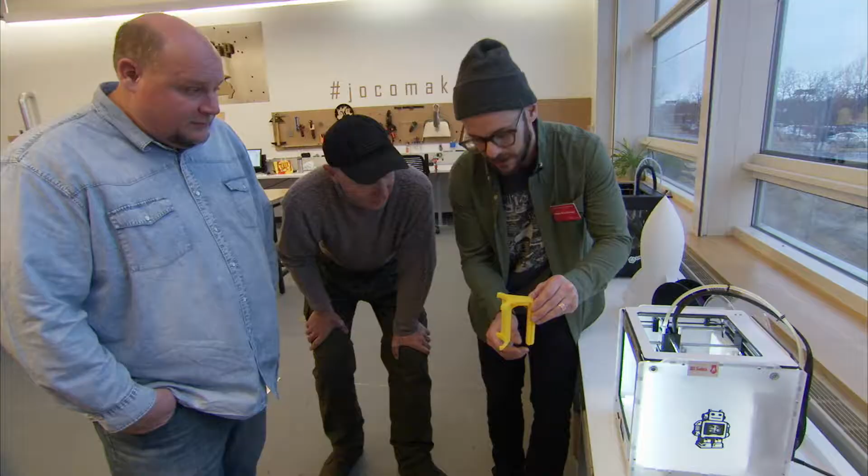Welcome to Make48. Everyone's got a big idea. Competition's come to an end. We now have 3 products that we can work with and take to market. The prize they get is a license agreement, and it's 5% of wholesale. The inventors themselves get to retain the patents on the product, and that's really important because they get to have that as an asset that they can sell one day, or it can be acquired by a bigger company.

The strategy of this is going to be really important. We're going to use a whole bunch of different companies, a lot of experts. We have to get opinions from several different people to help this product advance all the way through. Licensing is a very common procedure that happens in the invention industry. Inventors and creators have the idea but just don't have the resources to get it all the way to the end.

So we're in New York City and we're here about to go into S&S Design and meet Nisha and her team and talk about that drink slinger. My name is Nisha Sani. I'm the founder and CEO of S&S Design. We're a global industrial design firm.

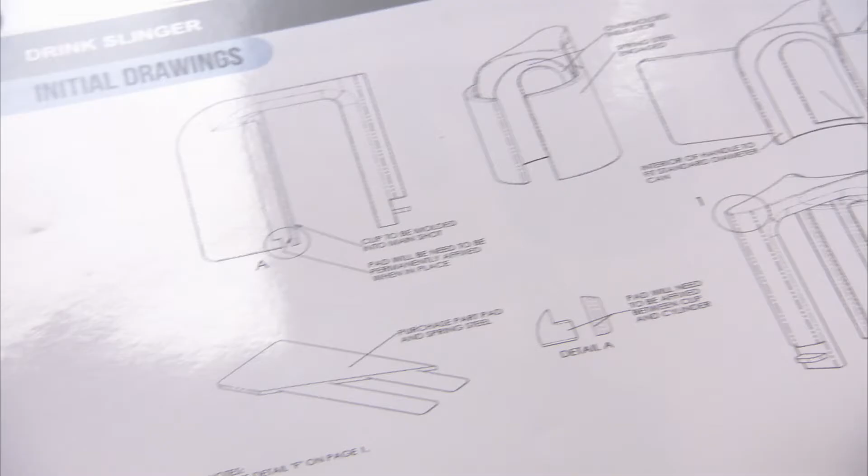Right. So we were thinking about how do we mass produce this, because there's no way we can do a solid handle. The handle was very heavy on material, so we had to do certain things to reduce the cost of manufacturing the plastic and the mold cost. So we tried to reduce the material and still make it stronger. So we provided ribs on the sides just to try it out, and we did a quick 3D printing just to see how much we can reduce material and save on cost. And with this, we realized that, you know what, there can be hygiene issues. So this is a problem that you're still working on, to clean that up. So we see it's an evolving process.

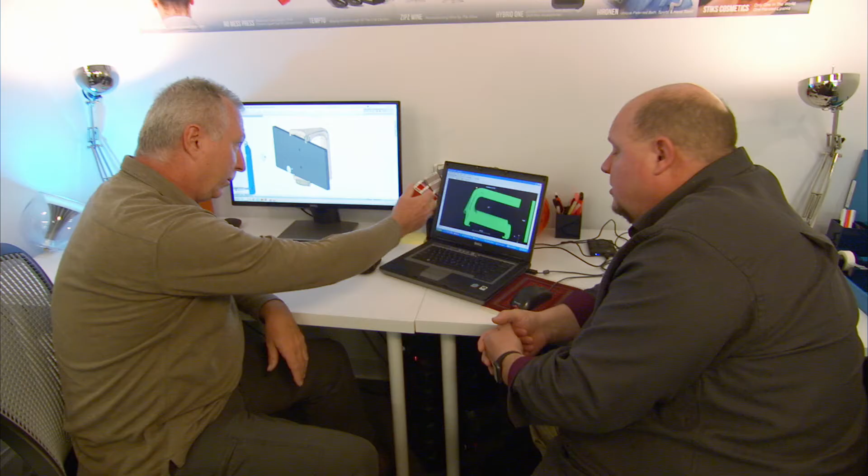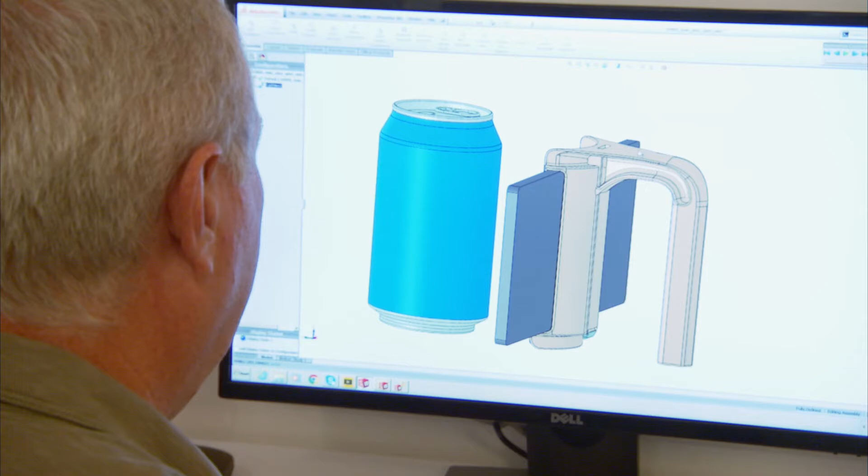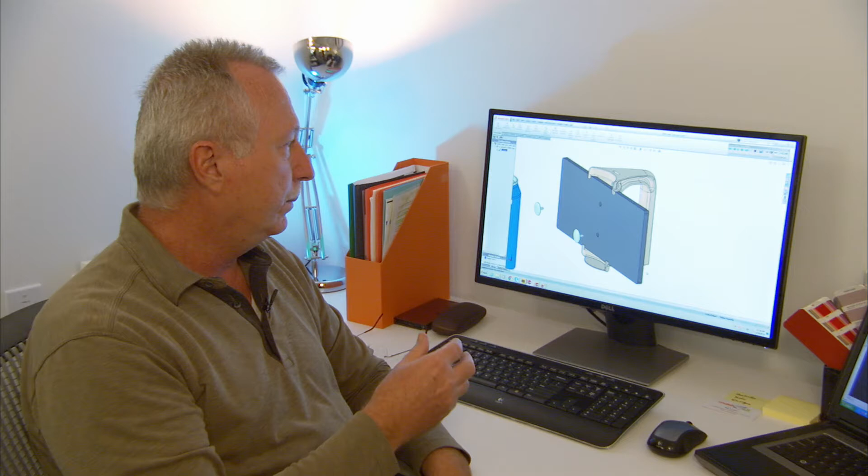Bob sits down with Joe from S&S Design to learn about digital tools that simulate injection molding. So you're always concerned about the manufacturability of this plastic, and those concerns are how is the mold made, correct? Yes. So is there a way for us to not have to spend all those expensive costs on a mold and trial it in the 3D world? The first iteration is always the lowest cost in tooling. They may not look the best, and then we'll have to compromise. Okay, we're going back and forth. This doesn't look good. I have too many ribs on a part. Let's get rid of them. Let's do it some different way. So we end up with a balance between aesthetic and manufacturability.

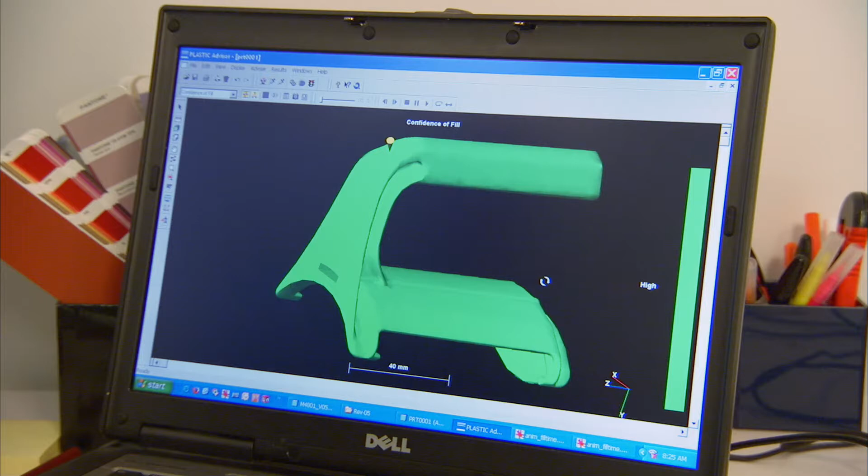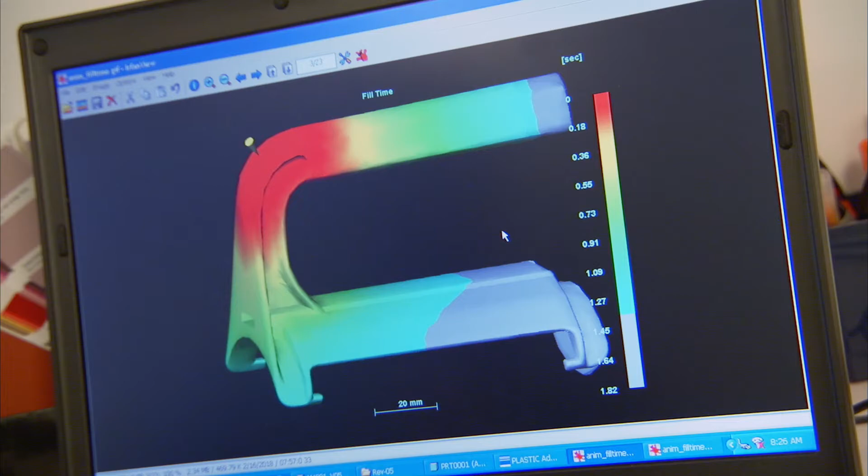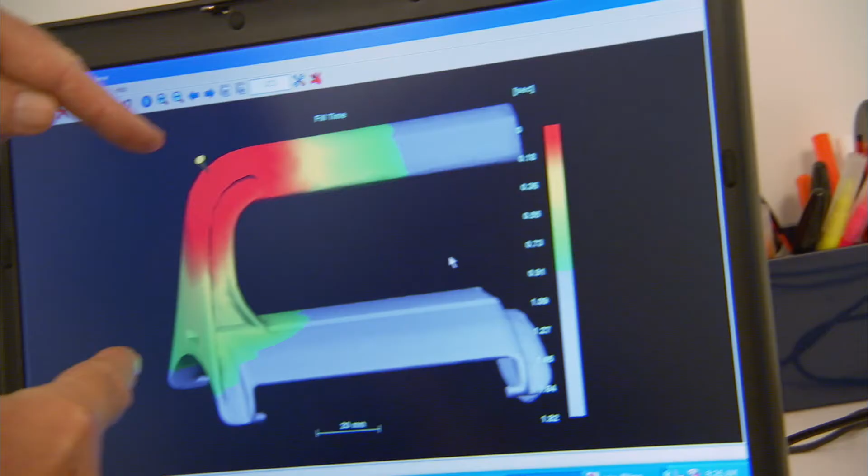Yes. In the old days, the tool and die maker that made the mold would know if that's an undercut or if your injection spot is too far away, it needs to be centered. When it cools off, will it curl? So it was a lot of trial and error. So it's amazing to hear all this, just something so simple, and there's a lot of detail and thought not only in that, but the design element, like you said, aesthetics and manufacturability. So the gate's important, the flow rate, you called it short shot, meaning it didn't fill the whole cavity and so forth. So there's a lot to think about. So that's why we need you.

The wedgie poses some unique design and manufacturing problems. Courtney meets Team DAD at Maku Design and Invent. We're here in Austin, Texas at Maku Design to go over the wedgie, and they redesigned it into a more manufacturable product. When we looked at the original photographs that came to us, the first thing that we had to do was talk to all the different stakeholders.

How would a customer use this? What are the different ways that we could conceivably build this product? What are the features that we have to have? Or what are the features that would be nice to have? Or what are the features that maybe we'll table for now?

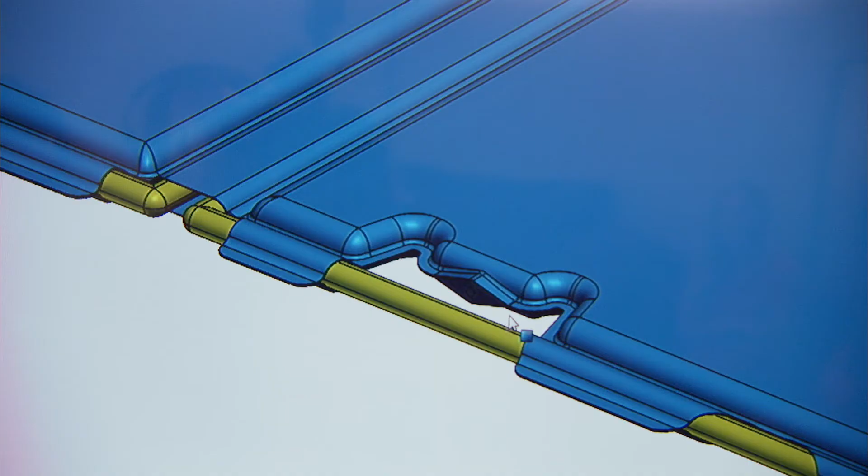A price point that's accessible to the mass market kind of limited it, but we didn't want to give up on quality. We don't want to give up on user interactability. So that's why Tim and the team from Maku put considerable effort into figuring out how you can actually build this thing in a cost-effective, manufacturable solution. We're not looking at a few units. We're looking at potentially tens, if not hundreds of thousands of units worldwide.

The wedgie overall is a simple product. All there is is padding, a little bit of fabric, and some hinges here and there. And so for the redesign portion of it, it's not going to be a big redesign like some products. The price point that we came to that we had to make this product for was roughly around $13 to $15. Yeah, and that's manufacturing cost.

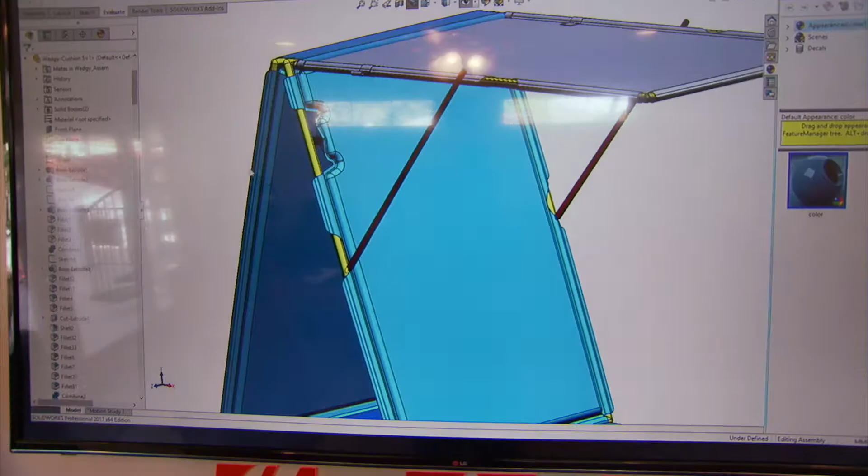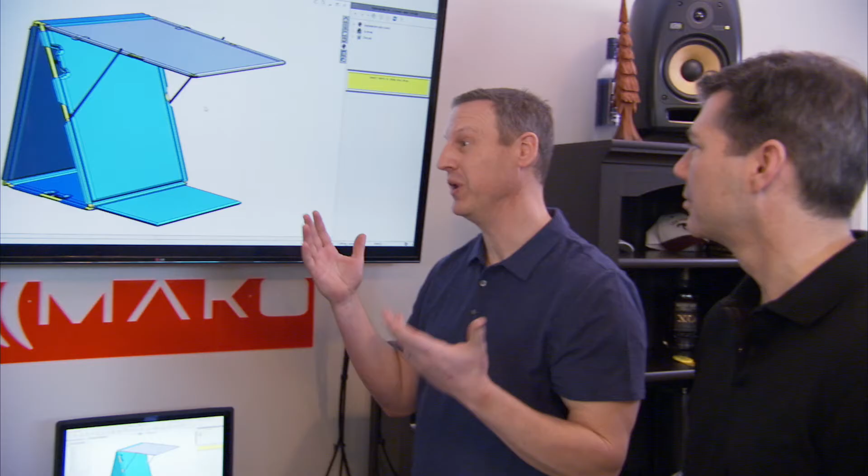The problem with the price point on this particular product is that there are very large areas of material on it. The foam and the outer covering are large pieces of fabric and large pieces of foam, and the cost mounts up pretty quickly. We did end up removing some of the foam in areas like this little pad down here, just to reduce the cost on that. But what we did add was a self-inflating system, so it acts a little bit like a camping mattress.

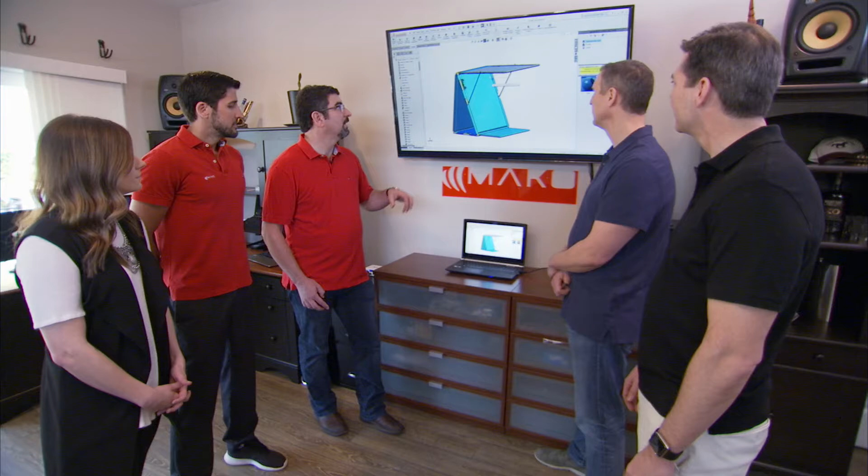I mean, we never would have even thought about that, or even thought that that was something that would fit into the price point. So it's really exciting to hear that. I think that's a great addition. We knew when we were making the prototype during the 48 hours, we were grabbing what we could. But that's why we're really happy with the fact that they have the fabric experts and the material experts to know what to make it out of. So really, I think they added a lot.

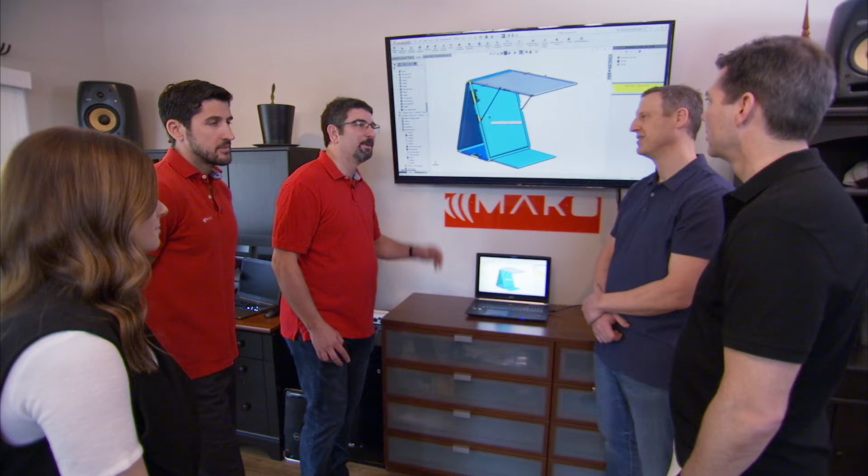It really comes down to the price of a few valves, and essentially the principle upon which an existing camping mattress works is that it has some foam inside it which expands and sucks air inside. So we already had the foam there. We thought we'd just add the air. Taking it from just foam pads, adding in the idea of the inflatable pads to make it less expensive to manufacture, more comfortable. That was an interesting and innovative approach to solving that problem.

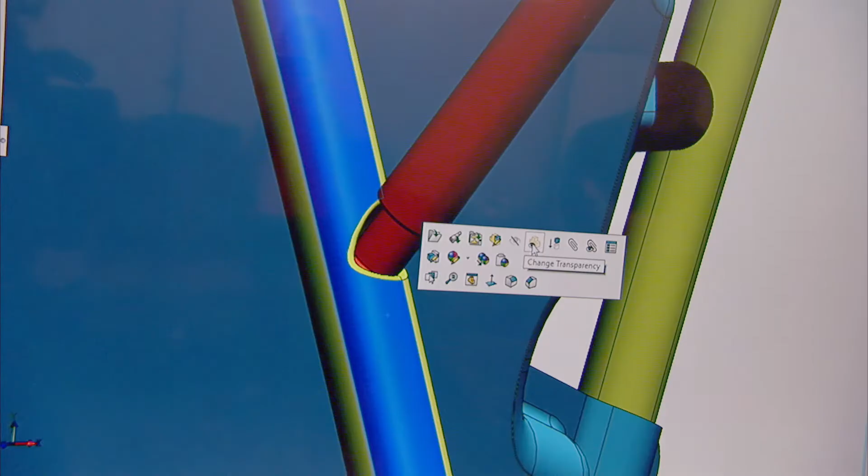So Tim, a question we had was around the awning and holding it in place. One concern was you're on the beach and the wind picks up. Does it snap into place and keep it from flopping around? The poles that actually hold the awning up clip into little slots here in the end. Oh, wow. It actually pops in there. It's got a little kind of mushroom head on that pin, so that it wouldn't just easily pull out again without you working on it.

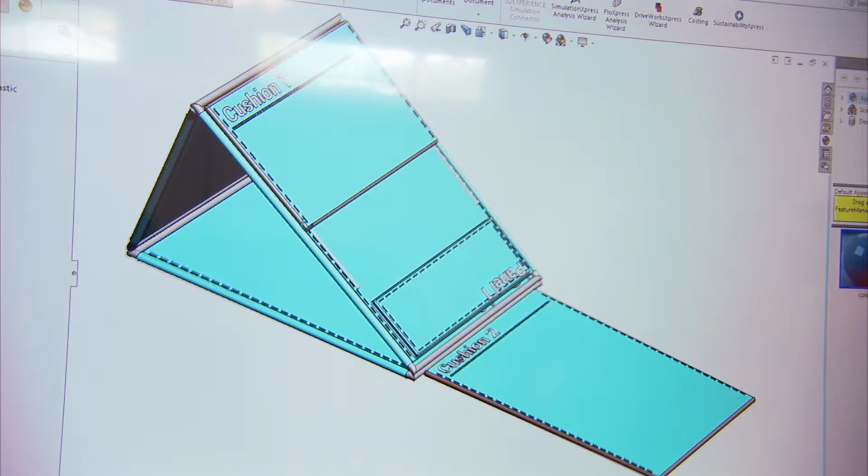Well, the interesting thing about this is that although it looks relatively simple in its final design form, there are quite a few different elements in it, quite a few different types of design techniques. You think about all the different materials: you've got the inflatable pieces, metal rods, plastic injection molded insertion pieces, and all of that. All of those are done in a way that is intended for mass manufacture at volume, which is really what's helping to pull that price point down, even just bit by bit. And it helps a lot for the eventual business, which is the most important element of getting this product out to the market.

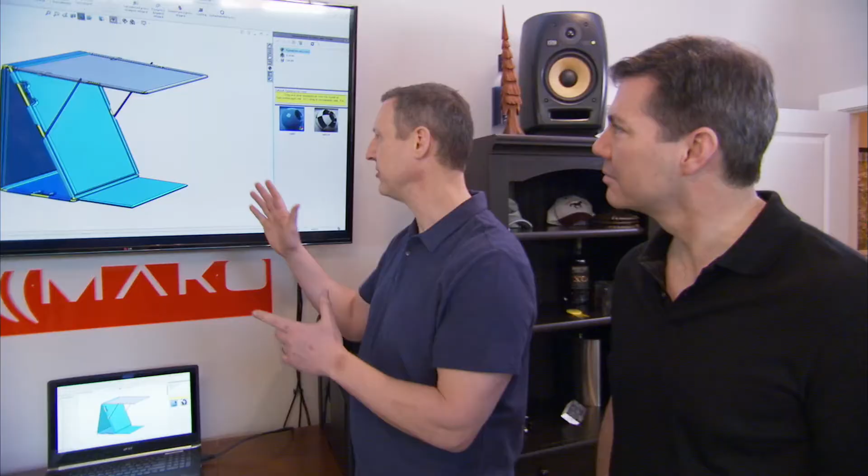In some ways, it validated our design because I felt like they didn't have to stray far from it to make the next level prototype. A lot of the structures were the same. They added in new features that were valuable, like the cushioning. To me, what differentiates it from a beach chair, when people ask why they'd buy this over a beach chair, is the fact that it lounges too. That's what makes this product so amazing, all the different configurations that we can get by just folding different panels in different ways.

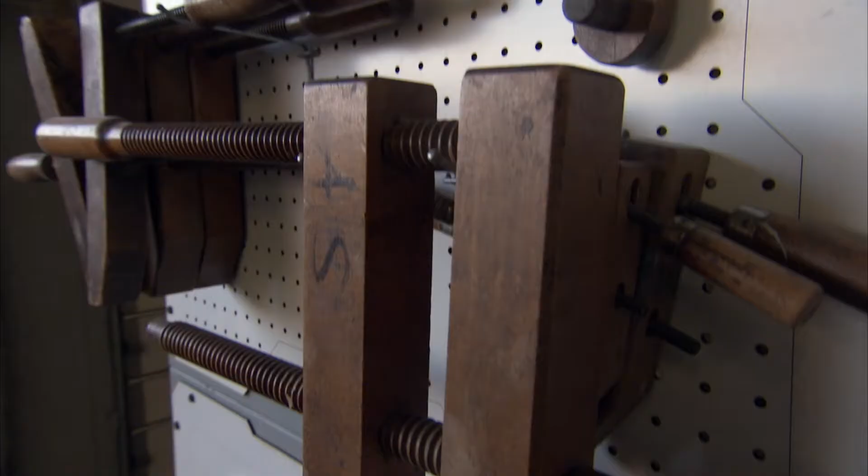Rich takes Joe from Team Believe to a local makerspace to discuss prototyping options for the 360 uplight. A makerspace is a space where they get to go use tools, have access to knowledge, tools that most people wouldn't have in their garage, 3D printers, laser cutters, including all your hand tools and wrenches and that sort of thing. So we're going to Hammerspace, that's a makerspace in Kansas City, and we're going to 3D print the 360 uplight. All right, gentlemen, this is Hammerspace Workshop.

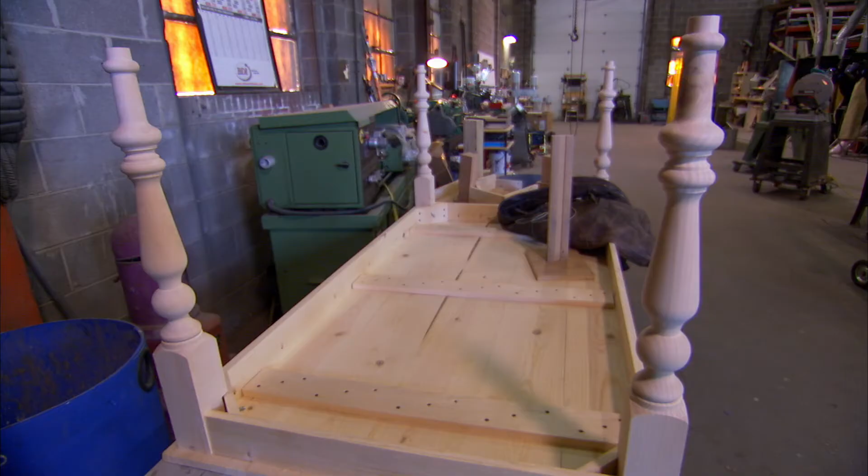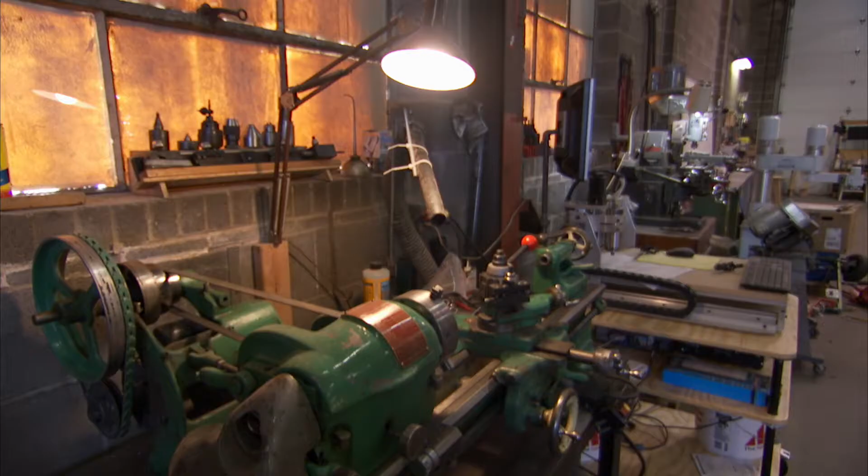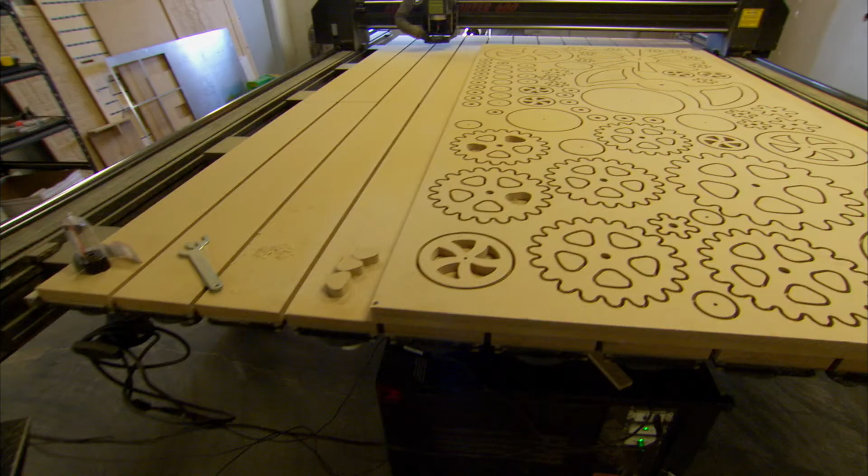We're a makerspace, which we like to think of as being sort of like a gymnasium for folks who like to build stuff. So instead of joining a gym so that you can have access to millions of dollars worth of Nautilus equipment and an Olympic-sized swimming pool, you come to the local makerspace so that you have access to walls full of tools, huge manufacturing equipment like CNC machines, laser cutters, and 3D printers. I would love to belong to something like this. Bring your dream in here and just make it happen. Pretty much like a playground for an inventor.

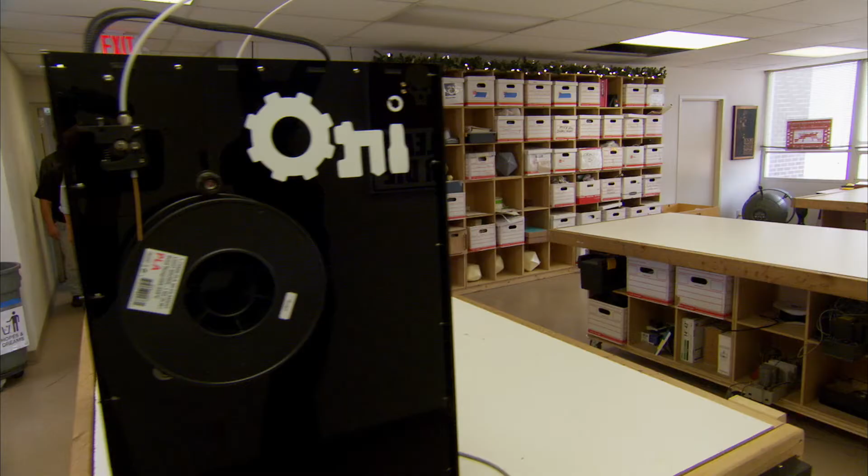So a guy could bring in on a thumb drive a drawing he needs laser cut or CNC'd and walk out, same day or next day with a professionally fabricated part for their creation, whatever it may be. I like that you can just come in here with your concept and you can just make whatever. This is the classroom space here at the workshop. This is where we teach things like drafting for 3D printers, or how to draw objects for a laser cutter, or sculpting, or other sorts of crafting.

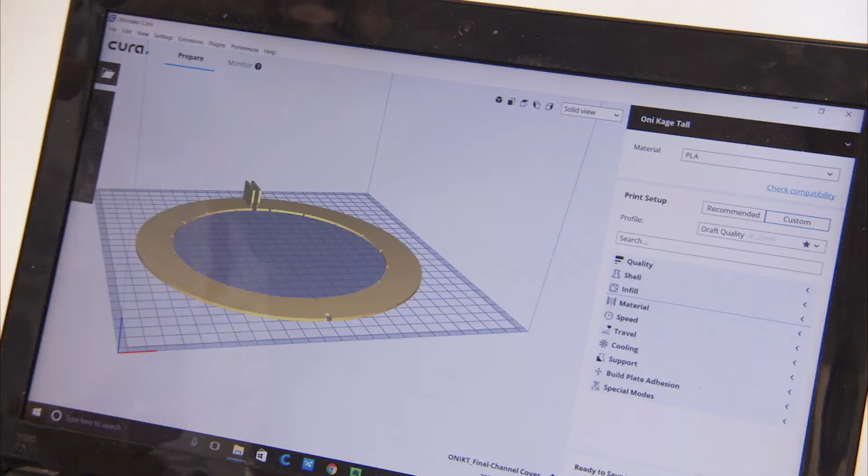What we needed for the 360 Uplight was a larger build platform for a 3D printer. So here we have a couple of printers that are currently printing some parts for the 360 Light. These are Oni Technology 3D printers, and these are made right here in Kansas City. Tom from Oni Technology developed these, and we manufacture them with his help here at the space. And we're going to print the first versions of the 360 Uplight on those printers so that we can get a nice look and feel model, make sure it works really well before we move on to the more expensive ones.

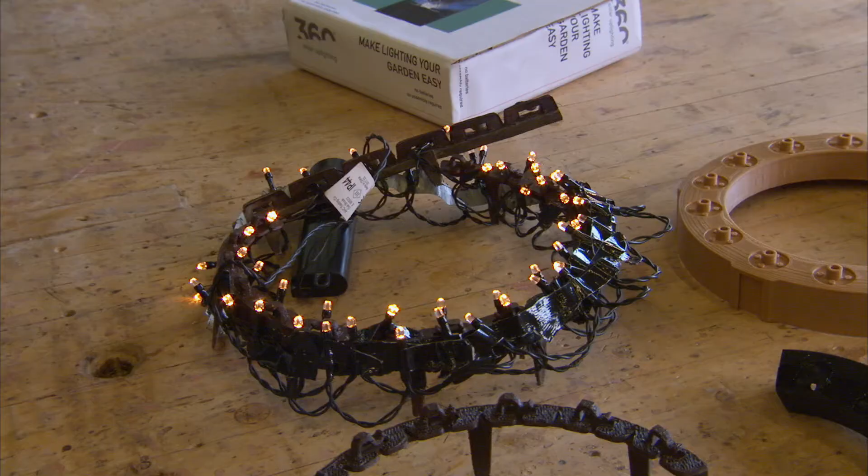Okay, Joe, you recognize this? Yeah. This prototype, I like to say the first ones always have to be ugly or you're not doing it right. I think it qualifies as ugly. Well, I think beauty's in the eye of the beholder. $48, it's not too bad. So get to your proof of concept and then iterate. Absolutely. Right. So speaking of iterate, we've come a long ways here through iterations of different 3D prints.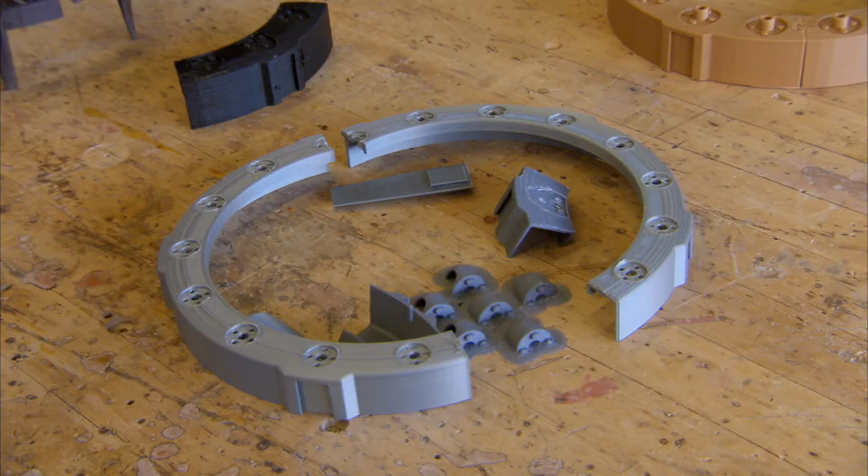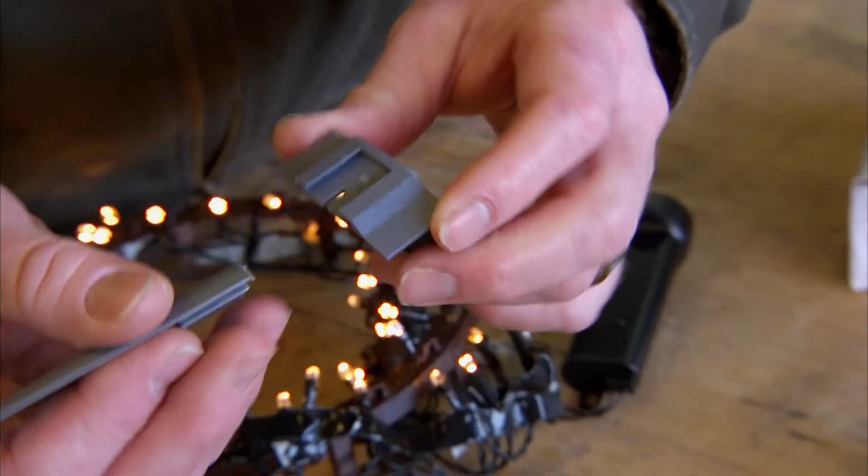This one, for instance, we did on our printers, which cannot print the whole thing. They can't print the full size because the build platform is just not big enough for your product. So what we did, we made it in pieces, which allows you to kind of prove the concept and take small pieces, short run, like this takes maybe a couple hours to print, and prove that that's actually going to work. I like it. Even though it's just part of it. We just take parts of it and print it. Then we can take those pieces and put them together, change them, figure out what works, what doesn't.

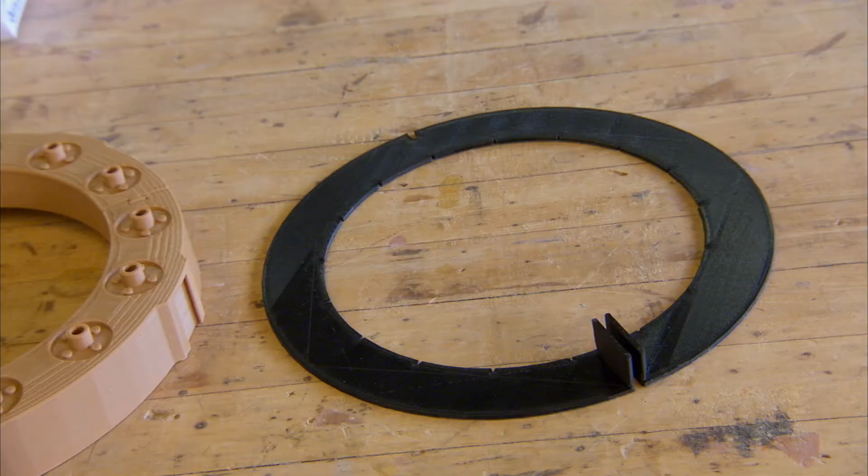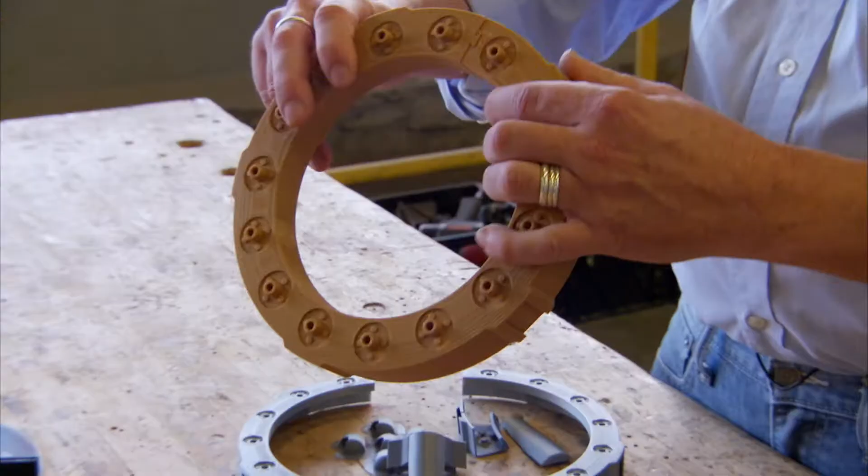And then when you're ready to make a longer print on a larger printer like Dave has, then we can do that and take the 20 to 30 hours it takes to print something like that. Right. And this came out beautifully. Take a look at that. Full size. Dave, that's what's up. Wow. Yeah, we were really pleased with how the part came out. You've got enough flexibility to get around a large potted plant or tree. And this should be a very similar consistency to what your finished commercial product will be when it gets done.

Can't wait to report to my sisters what's going on here. Team Believe, we're a really close family, and they're so excited about me coming down here to do this. And so yeah, I can't wait to tell them where it's at, how the 3D printing's going, how it's evolved. It's just a much better product now. At Make48, when we built the first prototype, what you used there, you just found Christmas lights, right? Yeah, we totally got them off the shelf. Just took them out of the stuff.

And right out of a store, off the rack, just plain old Christmas lights. Yeah. Had all these extra LED lights on it. We had to tuck them up under there. And that's a great way. Just use products off the shelf, hack together whatever you can. Right. Then after that, you want to start refining that process, and the process actually evolves into a product that you would see on a store shelf.

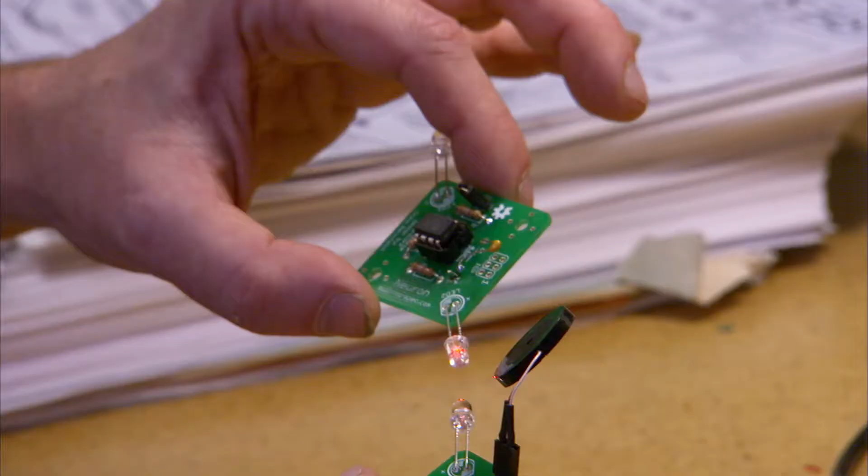So let's say you're inventing a product like the 360 Lite that needs LEDs on it. You could design a product, design those lights, exact spacing, exactly what you want with the right LEDs. One of the things we did on a 360 Lite was we ordered some LED lights with a battery pack. You can custom manufacture exactly what you want for a part to go in your end product. So you can search what you need made and find manufacturers from all over the world, a lot in China, that will make exactly what you want.

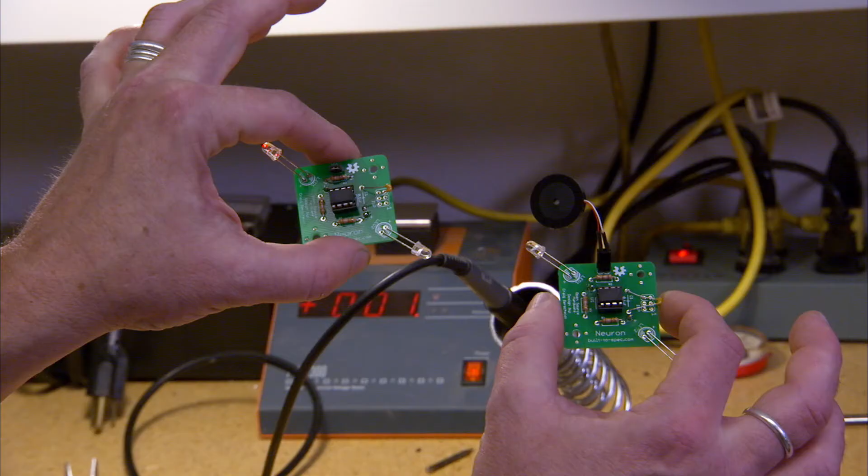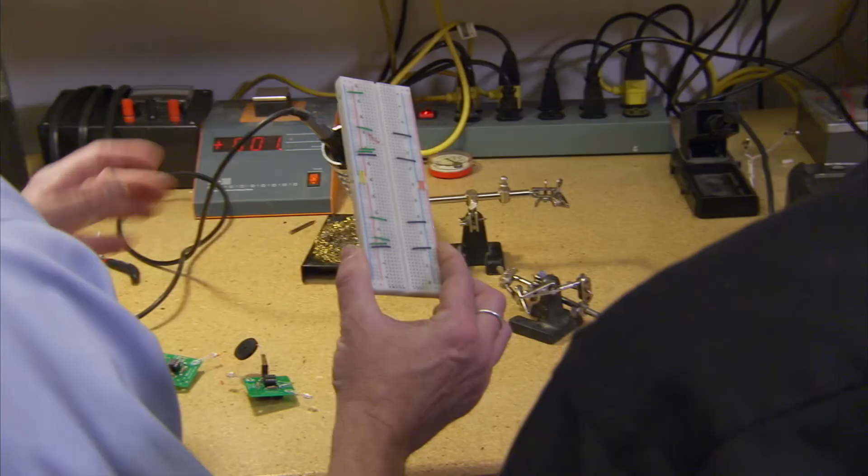They'll give you a quote. Quotes usually within days. They'll send drawings, and you can go back and forth with them and get exactly what you want made. So the process goes, okay, I give them the exact measurements and all that, and then they would send me like a sample of it, right? Right. What would that cost me? A lot of times they'll do free samples, but it's fairly inexpensive because they want the big deal. They want to do a container full.

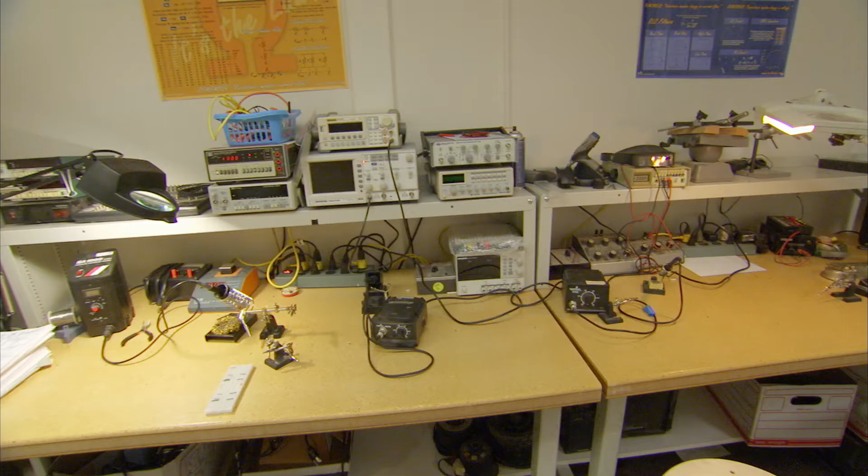Like say I came here and I need that information. Would you be able to help me get that? Yeah, that's what the Makerspace really excels at. Now here in-house, what we'll do is we'll take you downstairs to the store and get you set up with LEDs and other components that you might need that we carry right here in-house, and then help you develop a prototype printed circuit board based on the breadboard that you develop here in our electronics lab. So we could take that down to the laser shop and fabricate a copper-clad board that you could lay out and make sure that the design that you're sending off to your manufacturer is going to function before you commit to several thousand units. Right.

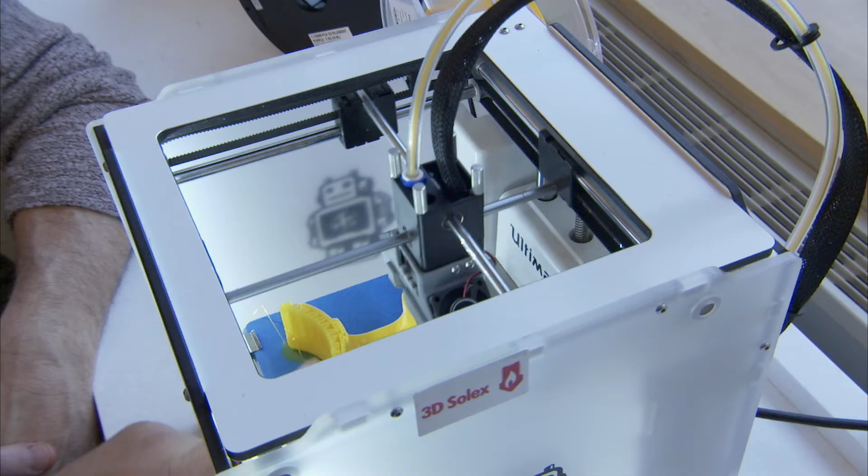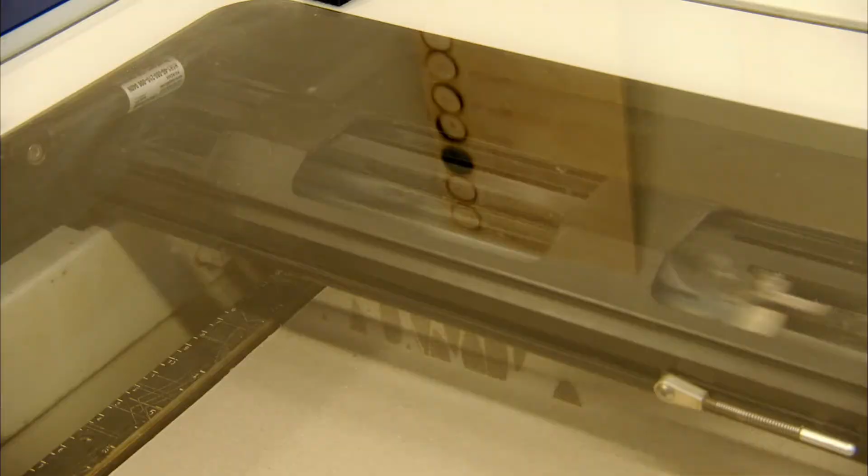Bob, along with James from Team Mount Hoodlums, goes to a nonprofit makerspace at a public library to get help with the first prototype of the Drink Slinger. My name's Nick Wardbop. I'm one of the Makerspace facilitators here at the Johnson County Library Makerspace. And we teach patrons, we teach inventors, we teach hobbyists, nonprofits, anybody who comes into the library how to use the equipment. We have 3D printers, we have sewing machine, CNC machine, laser cutters, we have digital media production and a sound booth, all free. Patrons of the library. You don't need to be a card holder. You don't need to have a library card.

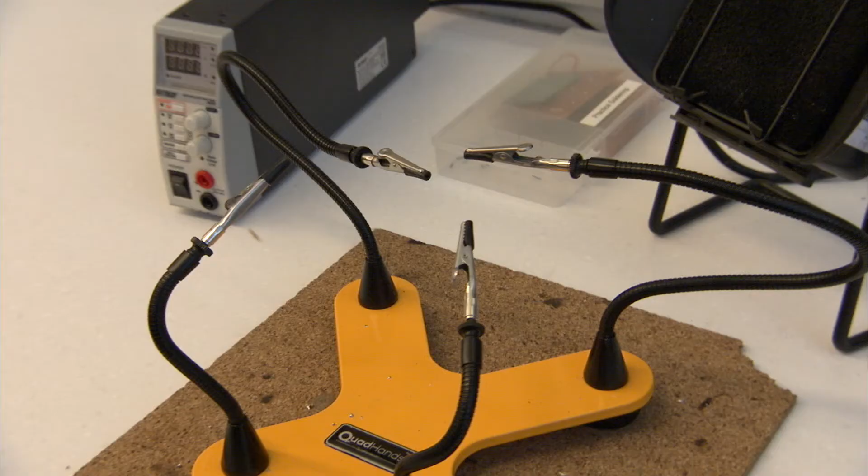So are there more makerspaces like this in other libraries that people can reach out to? There are. Kansas City, Overland Park, Johnson County, we're super lucky to have this library. But if you reach out to your community, I'm sure there will be a private makerspace or a public library makerspace that's going to help you. If you are an entrepreneur, if you're an inventor, you're looking to get something printed. I found that I use the TechShop a lot. I did all the classes there several years ago. I was working at a startup at the NASA Ames, and they paid for me to do all the classes, and it was wonderful. Yeah. And I've seen a lot of startups working in these spaces, and it's such an incubator for new ideas. It's fantastic. I wish my local library had this.

The new modern makerspace is kind of a new thing, but our grandparents had a set of tools in their shed or in their garage where they repaired or built furniture or things they needed around the house. High schools, colleges traditionally had woodworking and metalworking classes. As those have gone away, public libraries and other nonprofit and for-profit makerspaces have kind of filled that void. So if I bring in a CAD drawing that's already done, you'll 3D print it for me? Is there any charge for that 3D print? Well, you will 3D print it for yourself. We'll help you though. So it's an educational process. Exactly. You learn, this is such a gap in people's knowledge of how to use all this equipment to actually make real products.

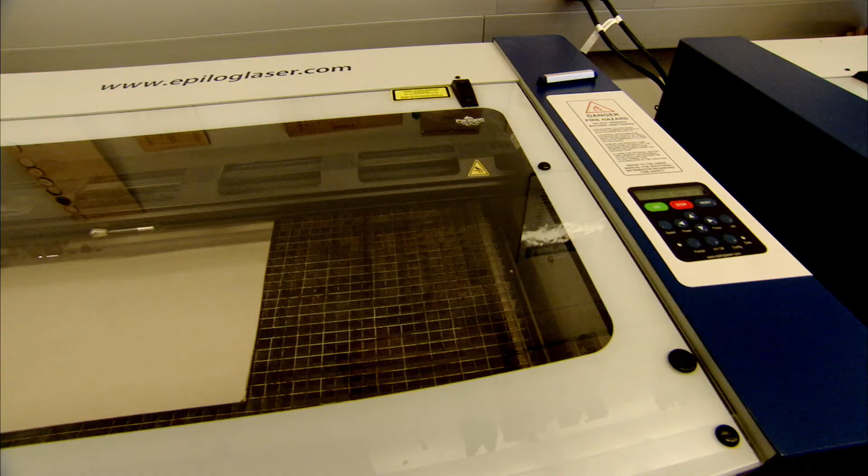It's actually really encouraging to see public libraries starting to do this. My library is a nice big library, but right now they've got just two 3D printers hidden in a little closet, and it's locked up. You don't have access to it. So I'd like to see more of that.

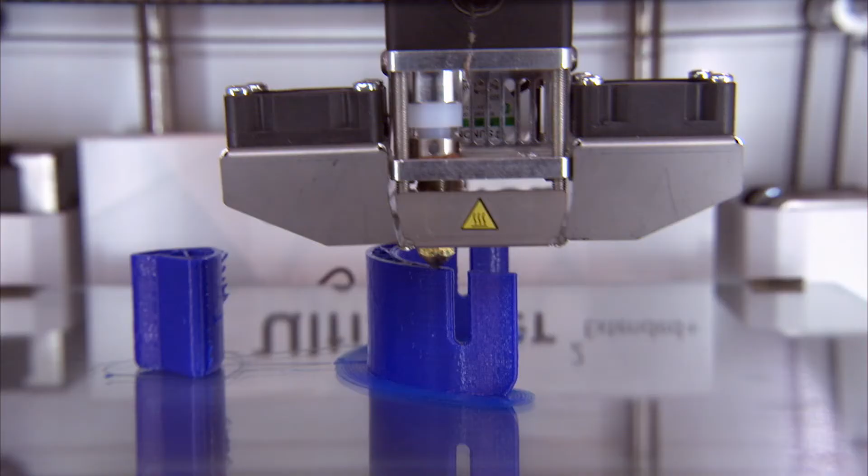So the first version. That's our first love right there from the contest. We had these, and we were really worried about this being too thin and breaking. Absolutely. So the whole deal with any project or product is the improvement, but more about manufacturing process. So we were able to take it pretty far at the event, but we realized it's so compressed, there's so little time that we couldn't work out all the kinks, and there were still questions about how to make it manufacturable.

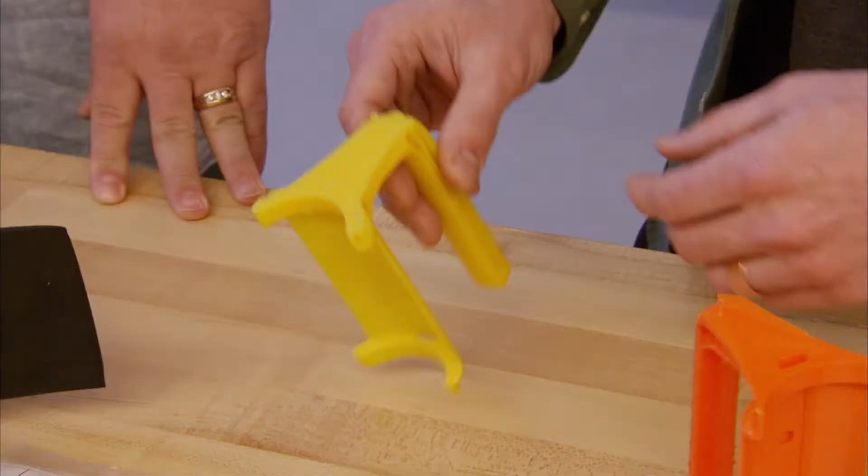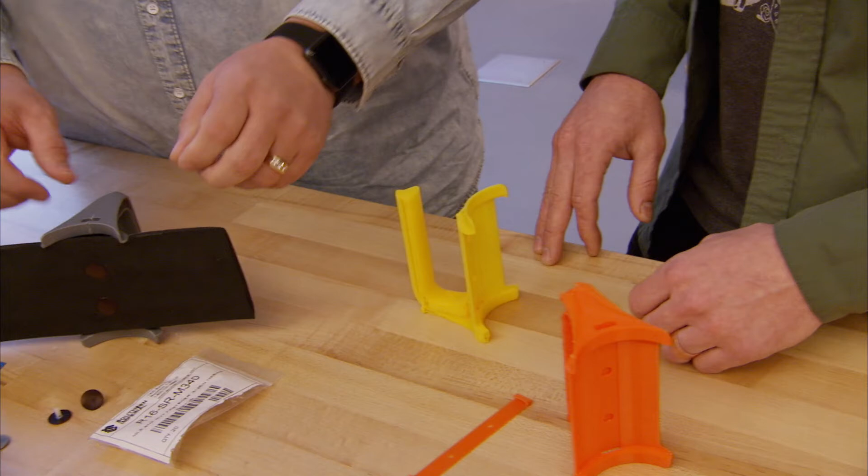So let's explain that. The build support, it looks like you printed it this direction. Correct. So if you take it without the build support, you'll see they've added little towers, and those, I assume, just break off? Yeah, it's like scaffolding. So you're working from your first layer up, and if something's overhanging, you have to have something underneath it when that hot filament's coming out for it to land on.

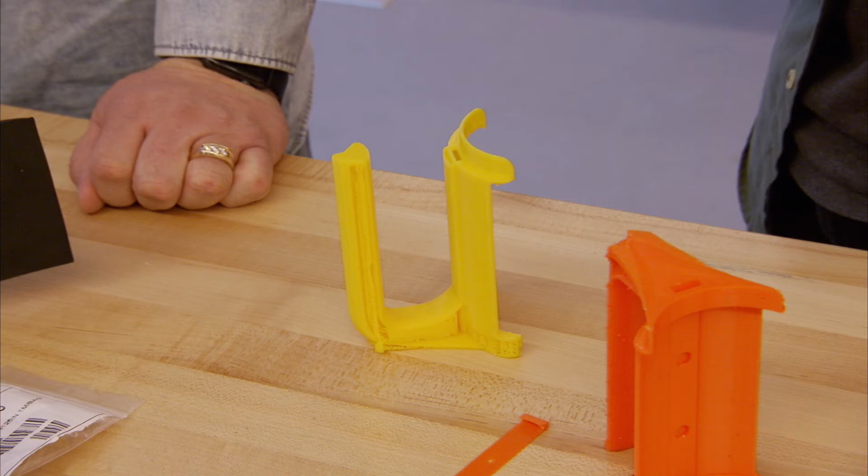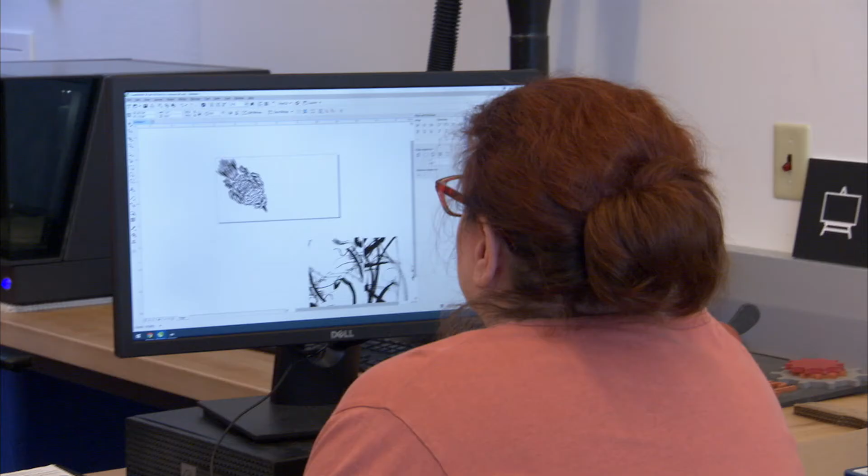Something as simple as the drink slinger touches on so many different foundational skills: geometry, physics, math, industrial design, and it's awesome that people can go and get those first iterations, those first prototypes here at the library, which is why our door count is somewhere between 150 and 300 per day. There's people coming in with ideas like that and executing.

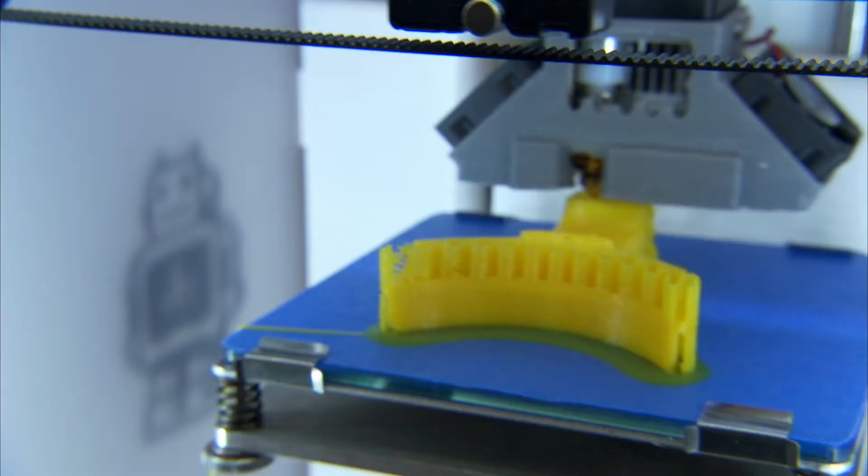So we've got the Ultimaker 2 going right now, and it's printing, you can tell, in this orientation. The reason is if we printed it like this, we'd be putting support structure all the way in this cavity. Oh yeah. So waste material, and you have to cut it all out. Exactly, and it'd be totally fine all the way up here without support, but once it gets to this, there's nothing underneath it to support it. So that scaffolding, that support material, which eventually will just pull out, you would have to do it that way. I can see here it says it's got 3 more hours to go.

That's right. 3 hours? You guys got 3 hours to hang out? Yeah, we do, especially in this place. All right. Cool.

You probably have resources like this in your community. You have to reach out, find the public library that has a makerspace. There are a lot of small nonprofit or for-profit makerspaces where you might be able to prototype your idea.

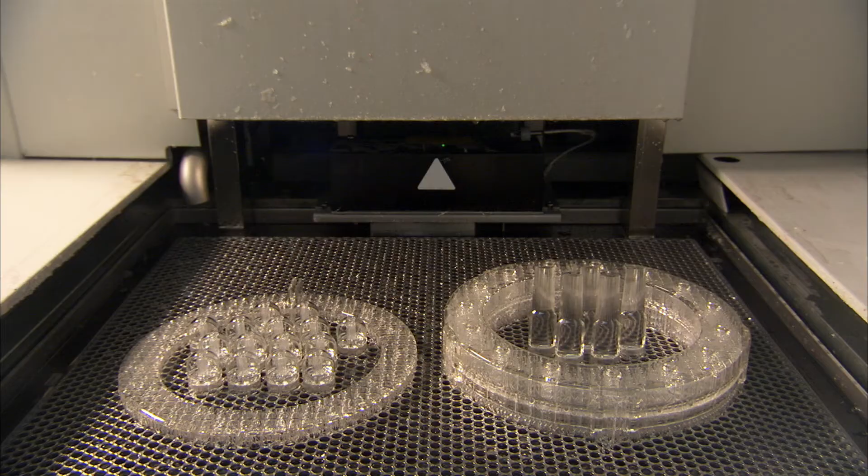On the next Make48, the prototypes get further refined. Good job. Nice job, Chris. Appreciate it. And the inventors get hands-on with their products. It looks like a finished product. Something you'd get out of injection mold. Then we check on the progress of the Whiz Bang product from Season 1.